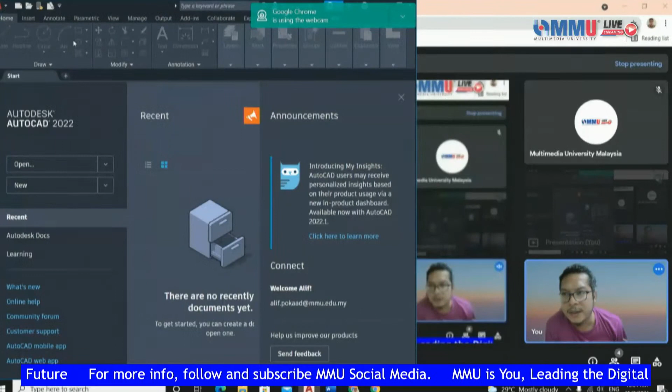So how we want to start the AutoCAD software? Basically go at here, at the start, and then click new. Then here you can choose any template that you want. They have Acadiso and Acad. The difference between Acadiso and Acad is basically just the units. Acad, the unit will be read in inch. But Acadiso, we read the unit in millimeter. So every drawing that you do is in millimeter unit in Acadiso. That's why in Malaysia we use Acadiso, because all the drawing basically we measure using the SI unit, which is in millimeter. And then we click open.

So then you have the first layout of AutoCAD software, like this. And then here are some examples that we will do today.

So because in this workshop it's 2D drawings, 2D meaning that they have just 2 coordinates, which is the X coordinate and Y coordinate, the position of X and position of Y. That's why we call it 2D drawing. We just have 2 axes, Y and X. And the plane that we draw is in the plane YX. Here is a plane YX, the drawing.

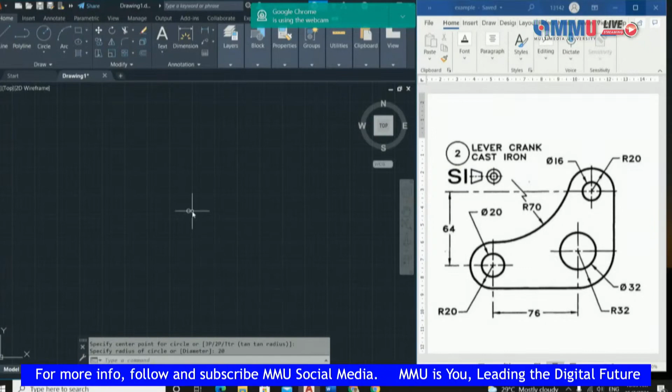And then you may zoom in and zoom out using the mouse. The mouse has a roller, right? You just roll the roller on your mouse and you can zoom in and zoom out like this. And to point, you just hold the roller, then you can point like this to find the positions. If you want to zoom in and zoom out, just roll the roller on your mouse.

Okay, so how do you want to know this is already R20? You can go to utilities. Under utilities, they have a measure. So you can just click measure and then choose radius.

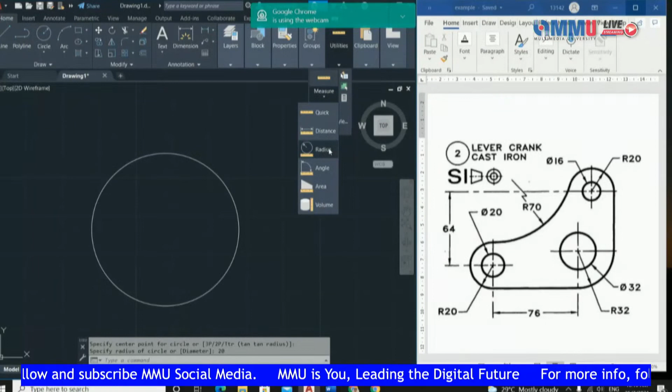Choose radius because you want to know the radius of this circle, right? So you just click radius, then select the object. Then automatically they give you the information of this circle, which has radius 20, diameter 40. So here already correct, R20. It's very easy to know whether your drawing is correct or not.

Just click at utilities, then find the measure. Okay, now the second part is you want to draw the 76. This 76 is a horizontal line.

And then the start of 76 is at the quadrant of the circle. So how do you want to get the quadrant? First you need to click the line, so you just click the line. And then it specifies the first point, so the first point should be at here, quadrant.

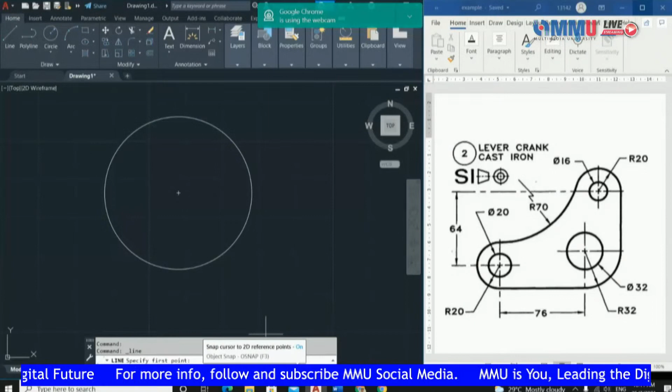Okay, make sure you get this symbol, quadrant. Sometimes your drawing cannot get the symbol because you're not on this snap cursor, so make sure you're on the snap cursor. You can see at the below, they have a snap cursor. Make sure it is on, or you may click F3 on your keyboard, then automatically it will turn on the snap, which is very important to show the endpoint, midpoint, center of this.

Make sure your quadrant is ticked. If not ticked, you need to tick it manually, otherwise you cannot get the quadrant at this circle. That's why you need to turn on your snap, make sure it is on. And then at here is a quadrant, so here is the first point of your line. You click the quadrant.

Okay, you see this line becomes free, right? You can go at any angle. But your drawing shows a horizontal line, so to do the horizontal line, you may click this one, ortho. Make sure you're on the ortho mode. If you're on ortho mode, it automatically goes to horizontal line and vertical line only. If you turn off ortho mode, then you can go at any position, any angle. That's why you need to turn on ortho mode, because we want the horizontal line.

The length of the horizontal line is 76, so you just put 76 here. Key in 76 and then enter. Then here is your line of 76. You may also use measure, click distance, first point, second point, then you get 76, meaning it's the correct line representing this horizontal line of 76.

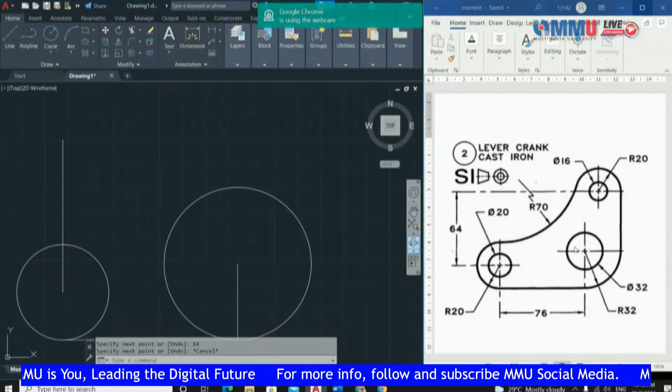Make sure you're on ortho mode, should be on. Then you get the vertical line, straight vertical line, 64. And here we don't know the width - the width we don't know. We know the height is 64, but we don't know the width.

So to get the width you need to use this quadrant. Click at this point, quadrant. Just put any line, as long as it's more than this 64. Then click this line, 64, and then click another line, straight like this. So then we know here is an intersection line - it intersects at here. Then here is 64, and here is this line - this line represents this vertical line.

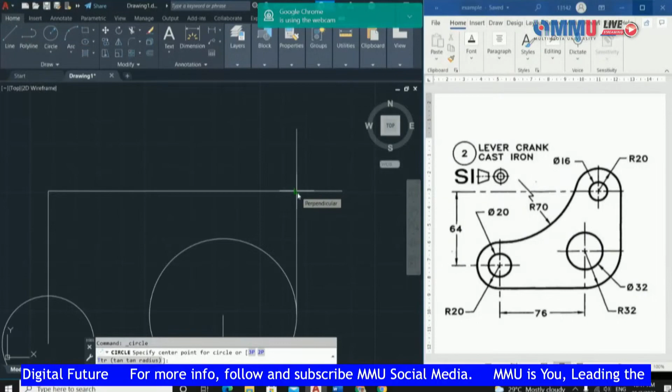Then we know that from here to here the radius is 20. Then you can use the circle, start at here. You find the perpendicular - that's okay - or you can use shift plus right mouse, you can find intersection also. Basically intersection. So how do you want to get this intersection? Click your circle first, should be center radius. Then use the keyboard, hold shift, hold shift in your keyboard, and then hold and click the right mouse button.

Click the one on the right side with your mouse. Okay, then you get this option. Go to intersection, and you get this intersection point. Then click R20. So we know that this intersection will become the center of the R20.

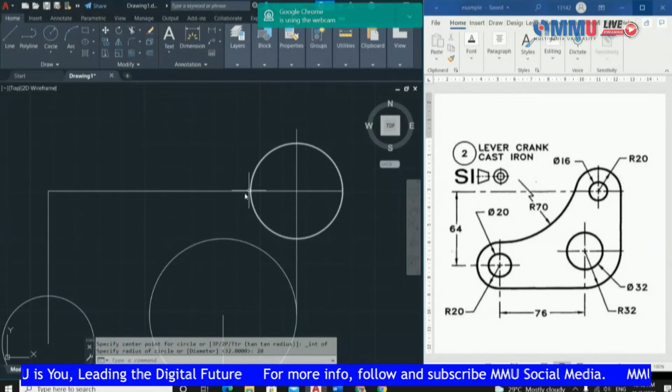Okay, here we have intersection, so just click center radius. You can use quadrant or shift right mouse, then go to the intersection. So this one is intersection, then click 20 at here.

So automatically here you may delete, because this one is just a draft line. Only this line, then you may delete. Then you get like this one. So here you just delete this one, because this line we want, right?

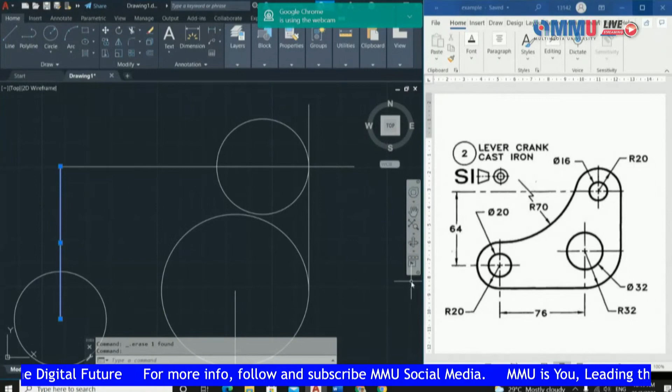This line we don't need. Also this line we don't need, just delete. So then you get this line. Here also no need the line. Now we want to trim the object because you see this vertical line until at this...

arc, right? Because here is the exit line. We want to trim this line. So how do you trim this line? You need to go to Modify, under Modify, then click Trim. Click Trim, and then read the command.

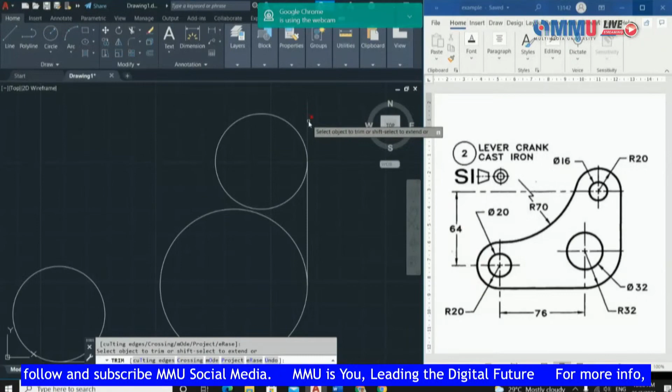They said this one, right? You just enter, use your keyboard, just click enter. And then click the line that you want to trim, then enter. So you get like this line.

So here also you want to trim, right? Because here also the exit line. So click Trim, and then enter in your keyboard, enter point. Then click the line that you want to trim, then enter. So here 1, 2, and this line.

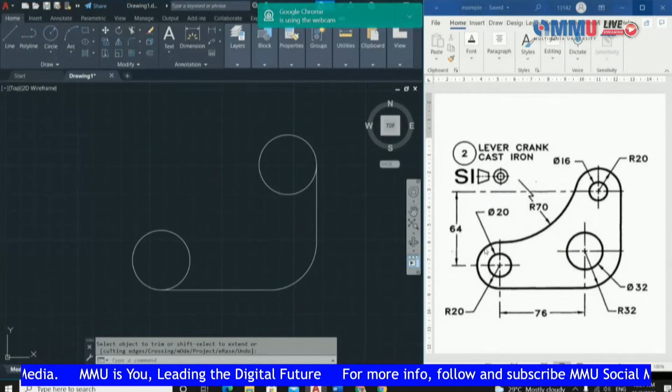Now we want to do R70. This R70 basically has conditions. This arc R70 is tangent at the R20. You see, the line connects with the tangent at the R20, and also tangent at the radius 20 at the above. This R70 is tangent at here, tangent at here. It connects with the other circle with tangent conditions.

So they give the radius 70. You may use tangent, tangent, radius. Use the tangent under circle, under circle, click tangent, tangent, radius. Tan, radius. Then you click tangent, tangent, radius, and they say specify the center point for the circle, or tangent, tangent, radius.

So you just find, you see, this symbol is a tangent. So you just click at here, then click another one at here, because here is a point of tangent, right? Click at here. Then they ask you the radius, specify radius of the circle. So the radius is R70, so you put 70, then enter.

Automatically they give you like this, R70. And then do once again the trim. Trim, and then enter. Then you may trim this exit line, then you get like this. Once again, trim, enter. You may eliminate this exit line, and then enter.

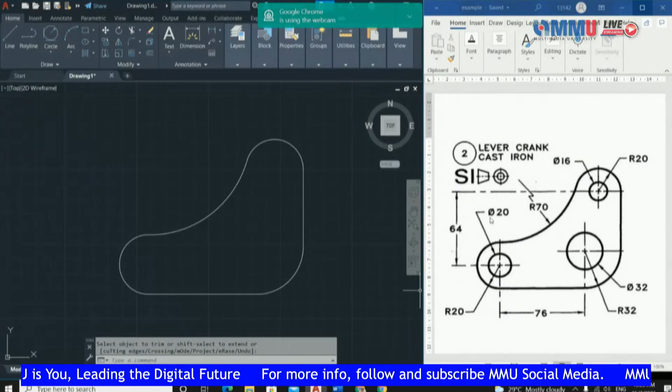Now we get the basic shape for this object. So here is the basic shape for this object. Now we want to do the small circle, right? This small circle has diameter 20. So here is the symbol of diameter, this one is the symbol of diameter.

Diameter 20. So you just click center radius - sorry, center diameter, because here is diameter 20. So you need to use center diameter. Then you need to specify the center of the circle. So if you see at here, the center of the circle is the same as the center of this arc.

It is the same as the center of this arc. You see this arrow, the arrow shows at this point. So that means this diameter 20, the center starts at here. The position of the center is at here. So you just go through with this line, then you can get this center. This one is the symbol of a center, you get like this mark, right? This one is center, then put 20.

Then you get like this. Okay, 20. Also same at here, diameter 32. Center diameter, click at here, this one, right? Okay, 32. Enter. Also same at here.

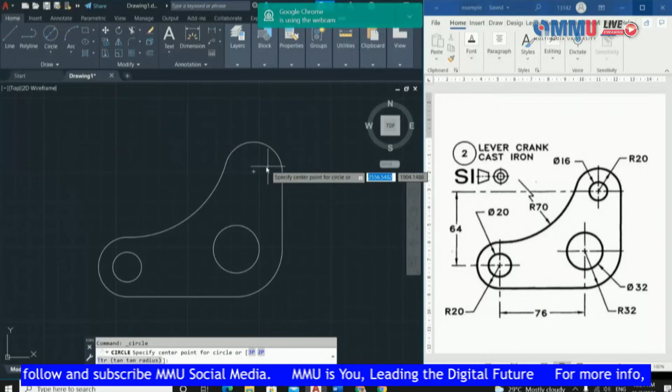Diameter 16, right? Okay, diameter 16. Make sure there is a center diameter. Okay, you just go through with this line, then you get the center. So here is the center point.

Okay, center, then here is diameter 16. Then this one is complete, the line. Okay, complete the line. So here is the object that you get.

Okay, now we want to create the center point. If you see at here, they have a center point like this, right? So to do that, there is a certain command that you need to write.

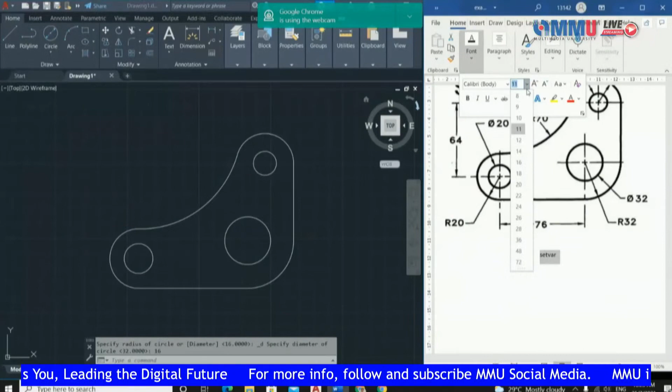Okay, the center command. So the command at here, first you need to click set var. Set var is a setting variable. There is a short command. Set var, okay, you can see, boleh nampak. Maybe I can add. Okay, you click set var, and then dimcen.

Then put -2. So here we want to setting the center mark of this circle. First you need to click set var, setting variable. And then the variable name is dimcen.

The variable is dimcen. Okay, and then you need to put the new value. Because this one is acadiso template, so basically we put -2. If there is an ACAD template, basically we put 0.1 for the size of a center mark. Basically this one is the size of center mark. -2, okay, and then click enter.

Click enter. So now we want to create the new layer. This layer we call it a center mark. So we go for the layer, then go to layer properties. Click the right mouse, and then click new layer.

Then you may put the name of a new layer. Maybe you can put center mark. Okay, center mark. And then maybe you can change the color if you want to change the color. Maybe you can put the pink color. Just click at here.

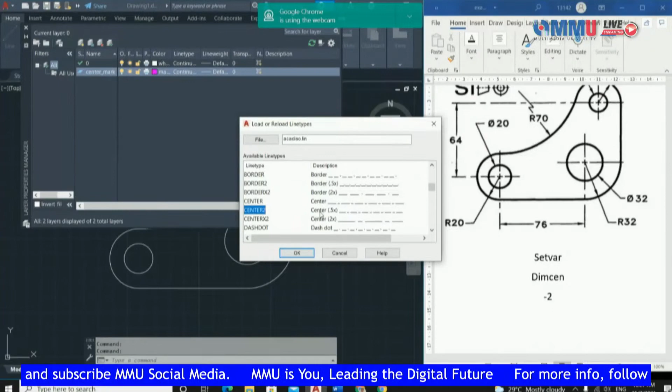So for example, you want to do center 2, because the difference between center and center 2 is the line scale. If there is center, just a 1 scale. If center 2, 0.5x becomes small 0.5, the line type scale. So better you put center 2.

Okay, center 2. And then choose the center 2. Then click OK. So automatic here will change to the center 2, the line. And then you just close it. And then if you see at here under layer, you may choose the center mark, because we want to create the center mark, right? So create the default as center mark. So if you see at here now, they will become a center mark.

So now we want to create the center line. So just type dim center. Type dim center, this one you get dim center. Dim center, you see the name, dim center. You just click in the keyboard, dim center.

And then choose this line. It's the same here, dim center. Then you get this center mark. Dim center once again. Then you get this center mark. So this is how we do the center mark in AutoCAD.

Dim center. Because here I'm using the default, not default, we call it common AutoCAD. Because in the AutoCAD software, they have many types of AutoCAD software. We have a mechanical type. If you install the mechanical AutoCAD software, you cannot...

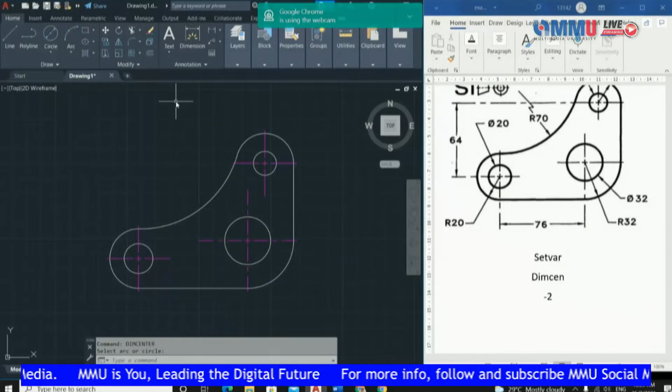No need to set up like this, because in AutoCAD mechanical, they have another toolbar at here, we call it center mark. Because here is common AutoCAD, it doesn't have a center mark function at here. That's why you need to set up like this. Setvar, dimcen, and then change to -2.

Okay, then you can set up the layer, because in AutoCAD mechanical, the default is the yellow color.

Okay, the default is a yellow color. But because we use common AutoCAD, you can change any type of layer you want. They just give you a rough layout, but you need to set it up on your own. That's the advantage here. But still we use the command.

Use the code: set var, dim send, and then -2. Then you can put the center point here.

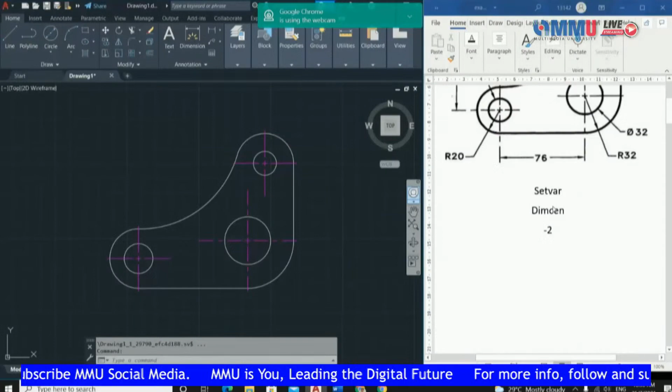So here is example 1. Now we go for example number 2, this drawing. Example number 2 is basically more difficult compared with drawing 1, right?

But it's okay, still we can do it. If you see here, it's like a hook. It's still a 2D drawing. Okay, how do you want to start?

Basically we start with this part, the diameter 48. So here we have a diameter 48, so we go for the circle center diameter.

Because here diameter is 48, right, should be diameter. Then you need to change the layer back to the default, the white color. If you see here, it becomes the white color.

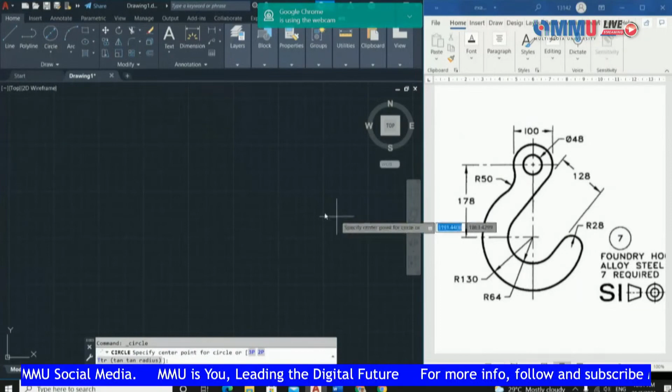So, center diameter 48. Diameter 48, and then enter. If you don't know the dimension, just go to utilities, then find the radius, click it. So they give you the diameter 48.

So here is the center, diameter 48. And then here we have 100, this is a diameter. Same, find the center diameter. Here should be the center, then put 100. Then you get like this.

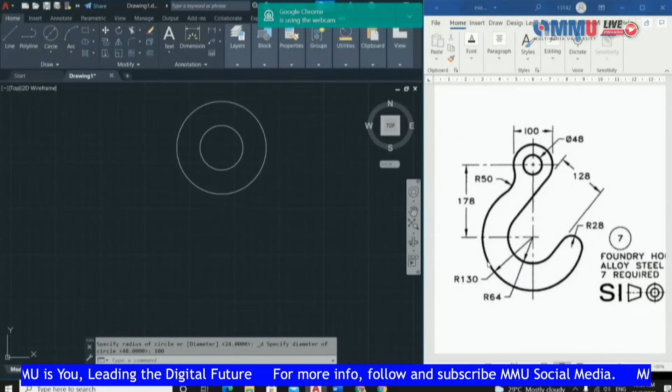Okay, now we go for the 178. This is to get the center of this arc. You see the arrow, it's very important, especially for the arc. The arrow gives you the position of the center of the arc or circle, and which circle represents the center as the object line. You see this arrow means this arc is R130, and here is a center line.

So we start with the line, starting from the center. Put 178, make sure you're in the ortho mode so you get the correct vertical line. 178, then enter. Then you may measure it to check whether you get the correct line. Correct, 178, right? Okay, and then here is the center point.

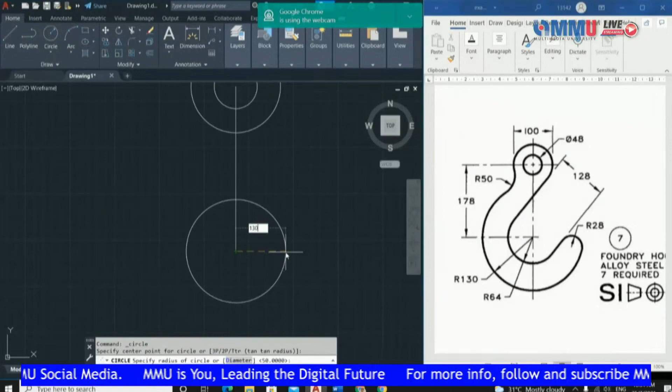And then we want to do the R130, so here is a radius 130. Go to center radius, find center radius, so here is the center point, then put 130. So here should be the radius. Then it becomes like this.

So here is 130, and then you get the R50, right? This R50 is this line, representing this arc. This arc is connected by a tangent, positioned with the 100 and also with the 130. 130 at here, then here is 100, meaning that it should be at here. The condition is a tangent radius, because you already have the R50.

So you do the tangent radius: tan radius. Click at tangent radius, then click at this point, start here, number 1, then start here until here, number 2, and the radius is 50. You get like this. Then after you get this point, you may trim. Click trim, then enter, and you may delete this line. Then you get this position. Now done for this one.

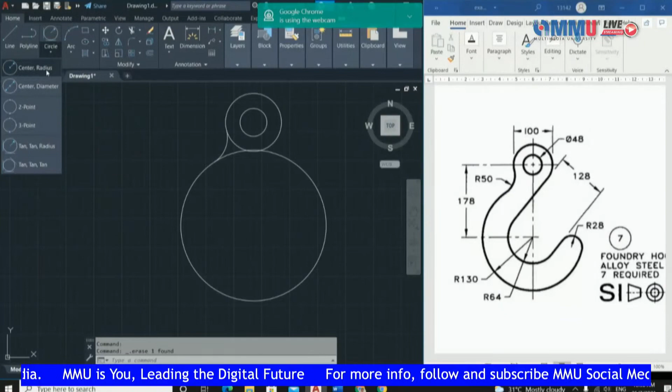Okay, same here, center point. And then 64. So here is R64, the point R64. Okay, now we want to do this line.

If you see this line, there is a straight line, and this line is tangent with the diameter 100, and also tangent with the R64. So the line is like this. Okay, so it should be a line. Click line.

Now here is a trick. You need to use the keyboard. Click shift, hold the shift point at your keyboard. Hold it, you need to hold the shift. Then click the right mouse, then you get this toolbar. This option, then click find a tangent. Okay, find a tangent, this one. Click tangent, then click at any point here.

Okay, tangent, and then do the same thing. Hold the shift at your keyboard, then click the right mouse, and then find the tangent. Just click it like this. Automatically it will create a tangent for you. You get a tangent like this.

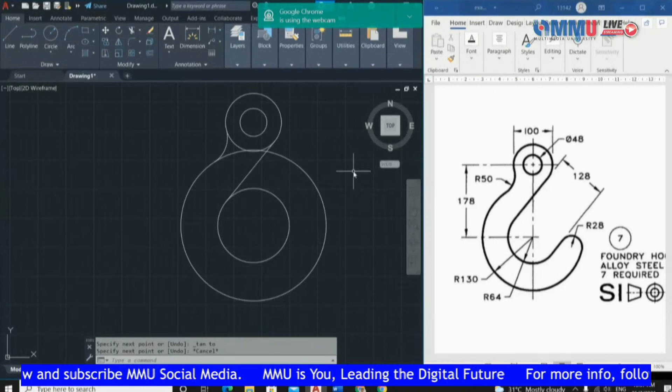So here is a tangent line, tangent line for this object. This line is tangent with the 100 and tangent with the R64. Hold the shift at your keyboard and then the right mouse. You click the right mouse, then you get this line.

Now we want to do the 128. This line 128 is parallel with this line. You see, this line is parallel with this line, selari, and the distance is 128.

This one you may use at the modified, under Modify toolbar we call it offset. Offset meaning that you want to do another line using the same previous line. It's like copy, but with a condition of the distance or width. So offset, and then they ask you about the distance, just put 128. Because the offset here is 128, right? 128, and then enter.

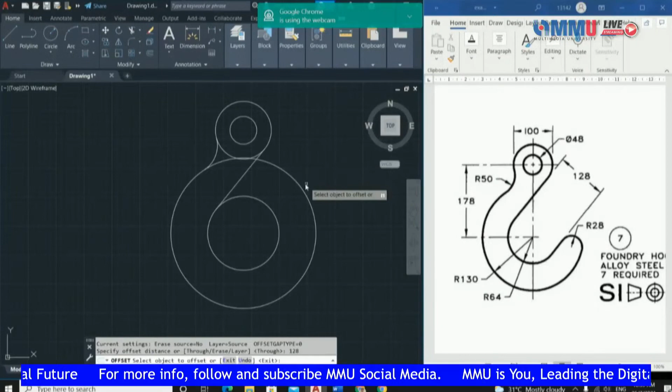And then you need to select the object, so here's the object that you want to offset. Then you need to click the area that you want to offset. It's not the above, right? It should be the below. So you just click at here, and then click enter. So then you get like this.

If you don't know how to get this one, whether it's correct or not, just do the measure. Measure, then click a distance, here to here. Then it's correct, right, 128. So here is a function of offset: you want to copy the line with the condition of a certain distance, then we can use offset. Okay, 128, like this.

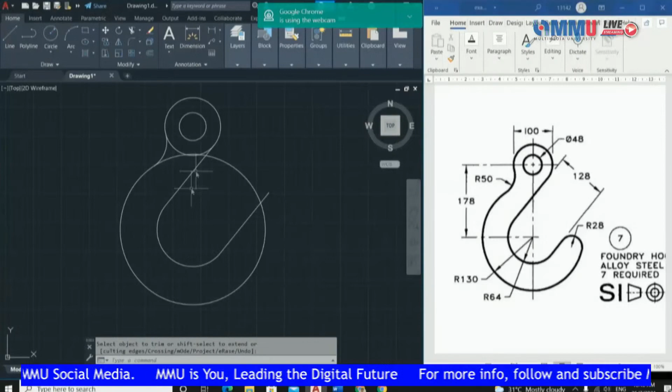Then here you may trim the object. Trim, enter, then you may delete this object. Delete the object. Now it's done until here. Now at the end of the part is this one, right?

R28, this R28, so this one radius 28 is tangent with this R64 and R130. So automatically you may use the tangent, and the radius is 28. So use a circle, tangent, radius. Tangent at here and tangent at here also, then put 28, and you get like this, radius 28 like this.

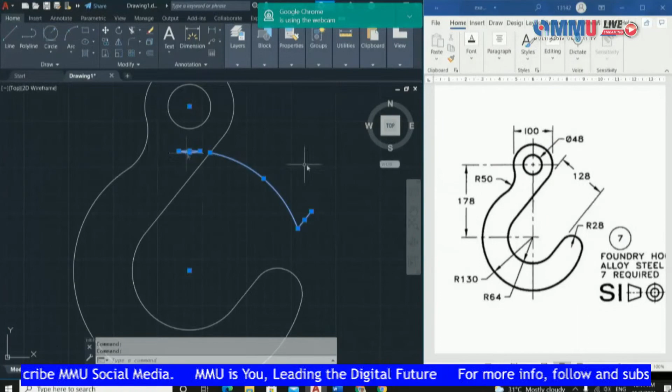Then you may trim the object. Trim, enter. So this one is the object that you want to delete, this one. And then the rest you just highlight it, and then just click delete. It automatically deletes for you.

Then you get the position like this. So here is the same like the object. And then you may put the center point, so same dim center, just click the same dim center because we use the same layout. So no need to set var, because we already set it. So dim center and then just click.

So just do the layer, change to the center mark, center mark at here under the layer. Choose a center mark because here you want to change to center mark. Then click dim center, and then choose at this object. So also same here, dim center, then choose at this object. Then you get at this point. So here is the function of a dim center, to show the center point of the object.

Okay, now we go for the example number 3.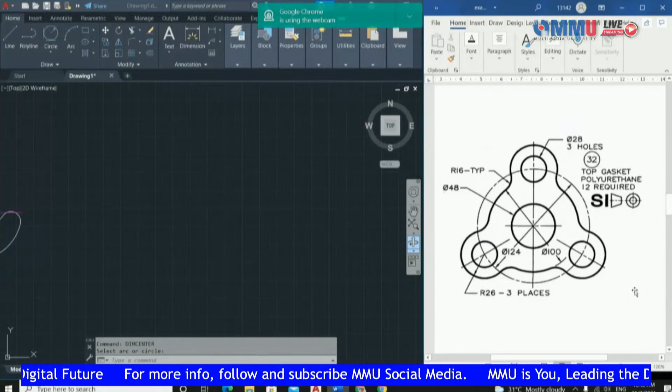Okay, example number 3. It's not the same as example number 2. If you see here, there is a symmetry point, symmetry with the 3 positions, with 120 degrees. Okay, so how do you want to start?

First, you may start here. Let me see, we start with diameter 124. Why do we start with diameter 124? Because if you see here, this dashed line is the connection with the center point for this circle and this circle.

If you see, this represents the center line for the small circle and the big circle. That's why you need to start with diameter 124 first. So circle, center diameter. Click center diameter. Here, 124. Why do I put the center mark? Because this line is not the object line, it's a center line, not the object line, that's why you see the line is dashed. That's why I use center line here, 124. Then change back to the default line, which is the object line.

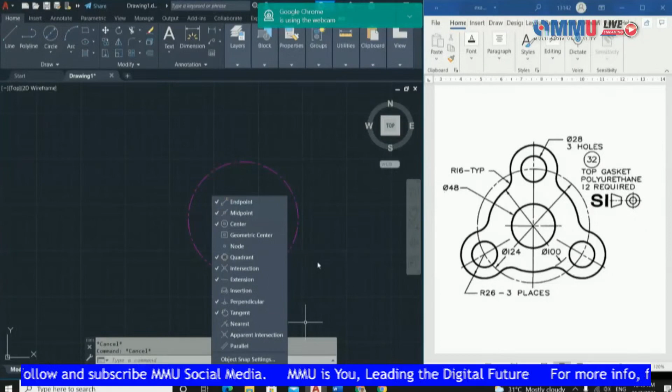Just click at this arrow, and then make sure you tick the quadrant. The quadrant is ticked. If it is off, you need to turn it on like this. Make sure your quadrant is on, then you get the symbol of quadrant. Here, equal with diameter 28.

Diameter 28, and then the big one is radius 26. You see the arrow, and then we mention this arc, the arc is radius 26. So center radius, at the same center point, quadrant, 26, radius 26, like this.

Now we want to get another two lines, which you see there is symmetry at this condition. So you may use the modify tools. Click on modify, click array, then find polar array. Under array, they have an arrow, so this arrow finds the polar array, click the polar array, and then first they ask for the object that you want to array. So this object, these two objects, you just click it and then click enter.

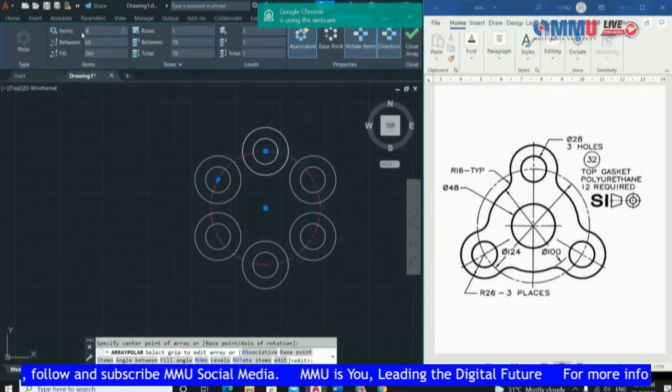Click enter, then they ask for the axis of rotation. You see this is a rotation, right? The axis of rotation is at the center of diameter 124, at this point, the center. Then you click it, and then the item here you change to 3. Change to 3 here, you see my cursor at the top right. The items here change to 3 because we just need another 2 circles.

Change to 3, then click enter and enter. So automatically it will create another 3 circles based on the reference of 360 degrees. So here is the circle.

Now we want to create this one, they have a diameter 100. So this one is diameter 100. Circle, center diameter. You want to do this one, diameter 100, and the center is here, the same center as diameter 124, it should be here. And then here, 100. So here is diameter 100.

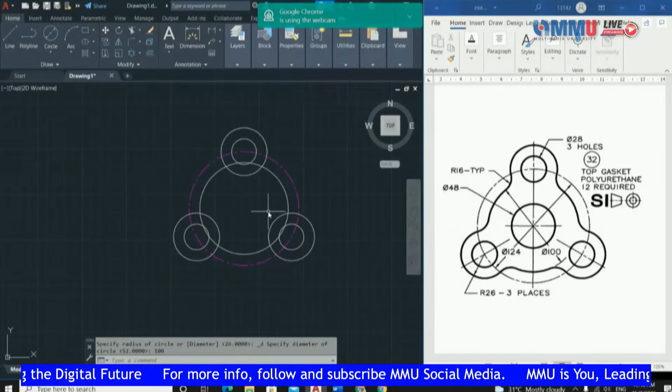Now, how do you want to connect between the diameter 100 and the R26, this one is R16. This R16 is tangent with the R26 and also tangent with diameter 100, tangent with diameter 100. So it should be tangent radius. Tangent here, and then the radius is 16, so you just key in 16, then enter. So automatically it will create R16 for you here.

Also the same here, so you just use tangent radius, tangent here, and then 16.

Okay, 2 point at here. Okay, R16. Because if you see it here, no need to show this line, right? Okay, you may hide this line. So how you want to hide this center mark of this pink? Because this pink color becomes mengganggu, right?

Mengganggu your eyes. So you may click at here, click this one, click right mouse. Then go to isolate, isolate and object isolation. So automatic - sorry, isolate, hide object, sorry, hide object. So hide object. Once again, make sure you highlight the object that you want to hide. Okay, isolate, then hide object. So automatically it will hide the center point for you, center mark for you.

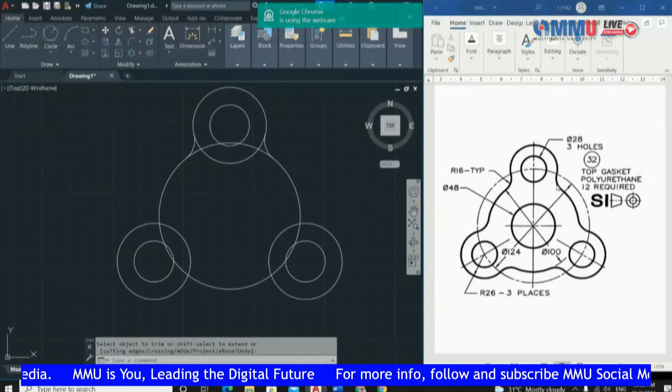Okay, then you need to create another two set, right? 16 at here, 16 at here, here and here. So use the same function, which is a polar array. Okay, polar array, and then click these two objects, 1 and 2. Okay, because we want to create another two set, right? Okay, another 2 number of set for this object.

Okay, you highlight it. Okay, and then enter. Okay, and then specify the center point. The center point should be at here. Okay, center point of the polar array. Okay, and then the item at here you change to 3. Okay, change to 3 and then enter. Automatic it will create another 3 line for you.

Okay, you see if I click it, it become as a one set. 1, 2. You see that they become highlight all the line. Okay, because this one you use the polar array, that's why it become a one profile. Okay, it becomes a one profile, it's not become a 6 profile. It become as a one profile. Okay, because you use array.

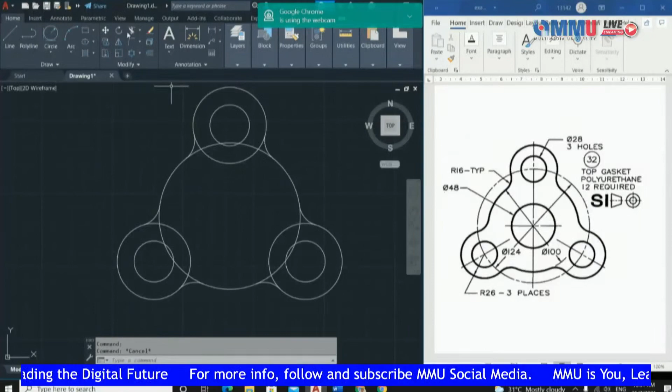That's why it's a disadvantage at here. Okay, why I will show it after this, why I said this disadvantage. Okay, now we want to delete this another line, right? This line. So I click the line, trim, then enter.

Okay, this one I delete it. Okay, same in here. Okay, so okay. Okay, also see at here. I erase it. Okay, I trim it, the object that I don't want this line. Okay, then here I delete. Okay, here also I delete it.

Okay, now you see what I said, it become disadvantage. Okay, because at this line, you don't want this line, right? Because this line is an excess line. You see at here, it doesn't have the connection line. If I click the trim, I want to trim this line, right? If I click the trim, I cannot trim this object. You see, it become the no entry symbol.

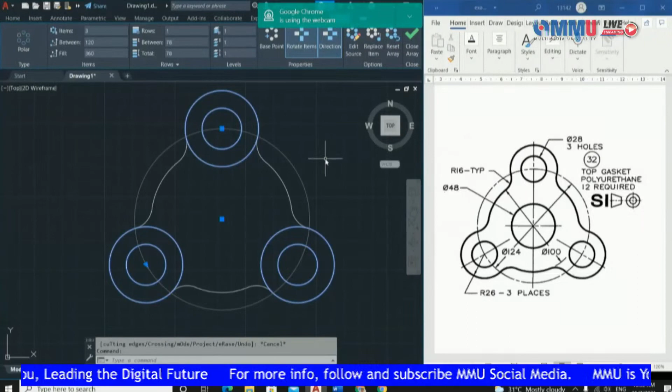Okay, I cannot trim the object because this object that I want to trim is not a one profile. There is the one set of profile, it's not a different profile. There is a one set of profile. That's why I cannot trim this object because I'm using the polar array.

So how you want to solve it? So to solve it, you need to explode it. Okay, so then it becomes the different profile. Okay, separate profile, it's not become as a one set of profile. Okay, you need to separate it. So how you want to separate it?

You go to the under modify, you need to click the explode. Okay, explode, then you may trim the object. Okay, you want to separate the profile, because you use the polar array becomes as all the profile become as a one set of profile, right? Okay, so click the explode at here. Okay, and then click this circle. Okay, click it, then enter.

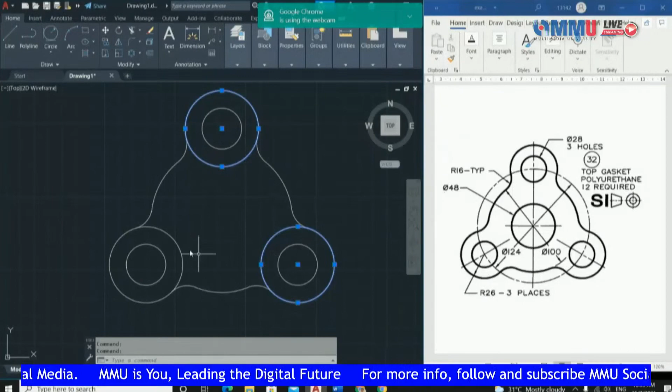Okay, so now if I click it, then it becomes separate profile. Profile number 1, profile number 2, profile number 3. Now it become a separate profile. That's why you need to separate it. If you not separate it, you cannot trim the object.

Use explode to trim it. Then you may start to trim the object. Enter, then trim this line, and this line. Automatically you get like this object.

At the center there is a diameter 48. Center diameter, because diameter 48, right? The center is at here, 48. Done, you stand at here. Finish, then you want to call back the center line.

Just click the right mouse, go to isolate, object isolation. So automatically it will show back your center line. Show back your center line. Okay, can. So here is...

Number 3 lah, the number 3 part here. If you want to create another this line, the center line, for example, you want to create another center mark.

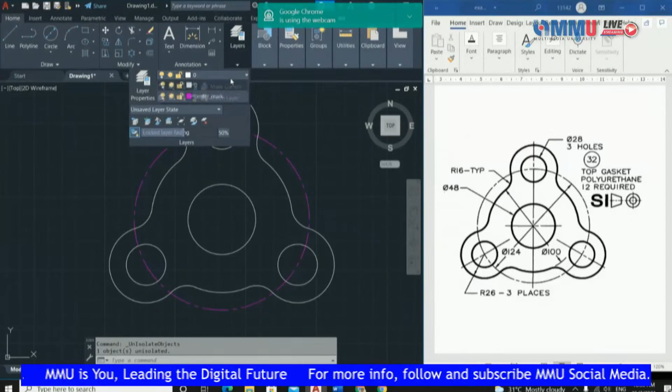Make sure you add the layer, change to center mark, then click name center. At this point, right, this line. Because you just need this point, right, this one can delete lah. Sorry, this one lah, you just delete it. So just remain this line only.

Go to the polar array once again, and select this object. Enter. Start at here, center mark, then change at here to 3, and enter. Then here it becomes the center mark of this line. Also same, then center for this line. So here is the center mark for this object, the center mark for this object.

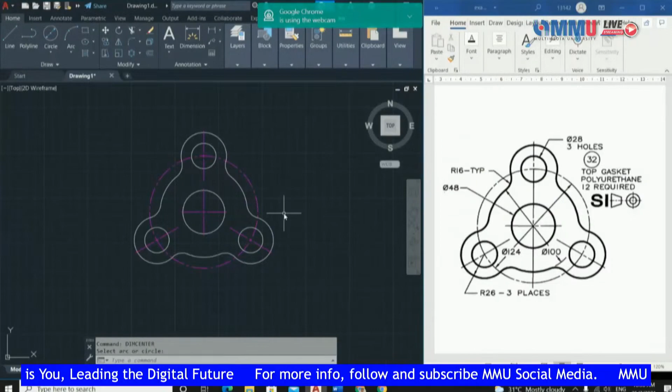So here is an example of a number 3 lah, example of a number 3. So because here is a tutorial 1, basically, tutorial 1 for the AutoCAD.

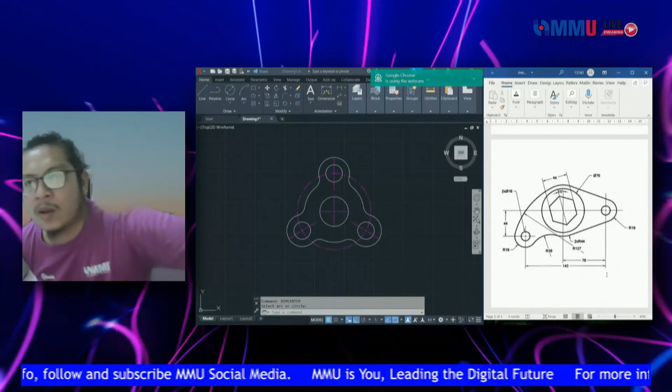Well, for me, if I teach a student, I will give a student 5 minutes to see the question first, to plan which point you want to start to draw, because the first starting point is very important. If you miss the correct point, it becomes difficult for you to answer the questions, because it's not just one step to solve it, there are many other steps to solve it.

Maybe you can start at here to solve it, maybe you can start at here to solve it, but which point is easy for you to solve it? The more faster you can complete it, it's very important, right, because during the test they have a constraint of time. That's why they need to manage which point they want to start.

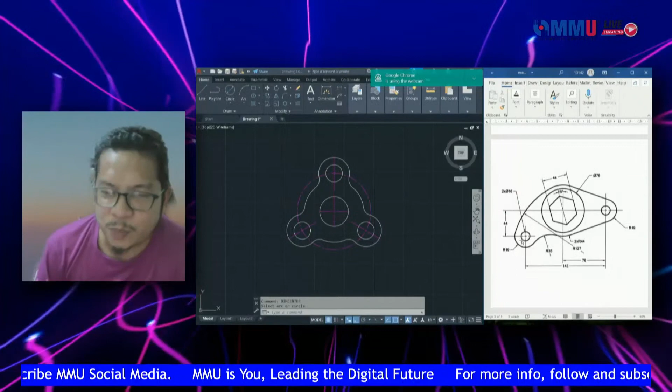It's not like the theoretical topic. Basically this engineering drawing, you need to practice, you need to practice. It's not just you memorize the theoretical and then you can solve it, cannot lah. You need to practice and practice, there is no shortcut way. So if you see these questions...

These questions, so you may start at any point basically. You may start from the radius 19, or you may start from the radius 19 at here, radius 19 at here. You can start from the below, or you can start at here, it's up to you. So first I start with the...

Saya start kat mana dulu kan? Saya pun terlupa. Okay, we start at here first lah, we start at here first.

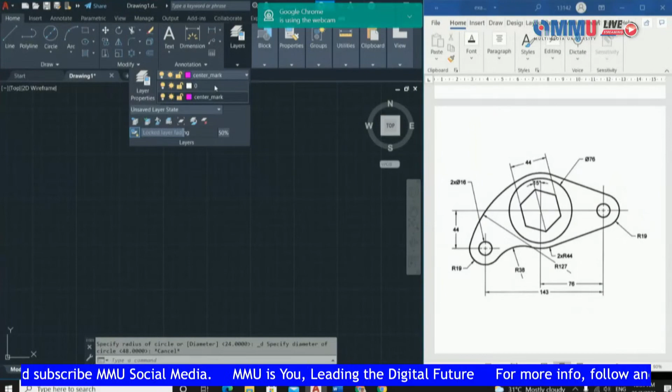So diameter 16, we start with diameter 16. So first center diameter, center diameter 16. So the layer I change it back to the layer, this one, layer. Diameter 16, so should be center diameter, center diameter, and then here should be 16, 16. If you measure...

If you measure radius, radius, so automatically here the diameter is 16. Represent for this line, diameter 16, diameter 16.

And then if you see radius 19, and then you show the arrow, the center, the arrow shows the center line at here. That's why you need to use a ruler. If you use a ruler, if you project it, you can see this arrow shows this center at here, meaning that this radius 19 is the same center line with the diameter 16. So change to center radius because there is the R19, right? The symbol is R, so R means represent as radius. So this one represents as diameter, the symbol, diameter. You see, right?

This one. Okay, so here is a radius 19. Center radius, and here 19. Radius 19.

Okay, then we do for this one, 2 times radius 44, meaning that they have a radius 44 in two circles. So first circle at here, R44, another circle at here, R44. Meaning that they have two radius 44, one at here, then 44 at here.

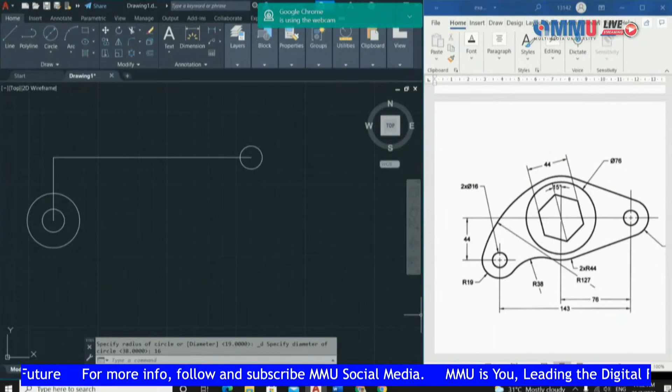Same, right? Because 2 times diameter 16, meaning that they have two locations that have the same diameter. So here is diameter 16, here also diameter 16. So it should be center diameter, and here 16. And then here also have a radius 19, same, like this, radius 19. So then center radius, same as center point, 19. Okay, and then here you may delete, because this one is just a reference line.

So now you have one line and another line at here. Okay, now we want to do the 76. 76 at here. Because this 76, you can get the center line of this circle, diameter 76. You can get the center line for this diameter 76.

So how you want to do that? This one, we know at here is 76. So basically I just do like this. Center radius, center radius. Then find the center of a circle. And then I put 76. Because I want to get the center point for this circle.

We want to do the diameter 76. So how to get the center point for this diameter 76? I can get it from this quadrant. So then I put the center diameter 76. And here, then find quadrant. Because this quadrant is basically at the same level with the center point at here, so automatically here to here is 76.

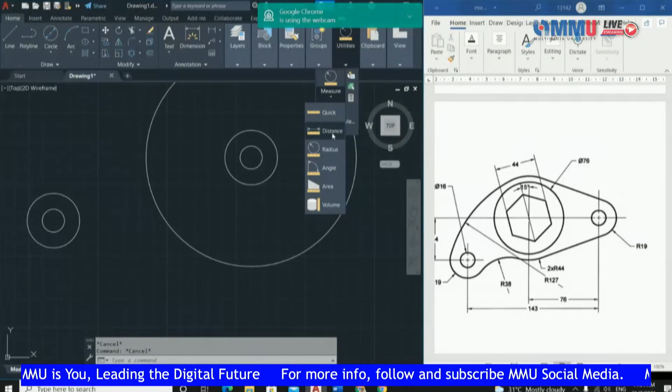You may measure it if you want. If you measure distance from this center point to the quadrant, it's 76, which is similar with this line, 76. That's why to start diameter 76, center diameter, I find the quadrant here and start with the 76, diameter 76. And I get this.

Then here, this reference line, you may delete, it's just a reference line only. So here you get the diameter 76. And then what else we want? We want the radius 44.

Radius 44. So this radius 44, if you project this arrow, it intersects at this center line, meaning that this 44's center line is same as the diameter 76. That's why you need to project this arrow. If you see, if you project this arrow using a ruler, it intersects at here.

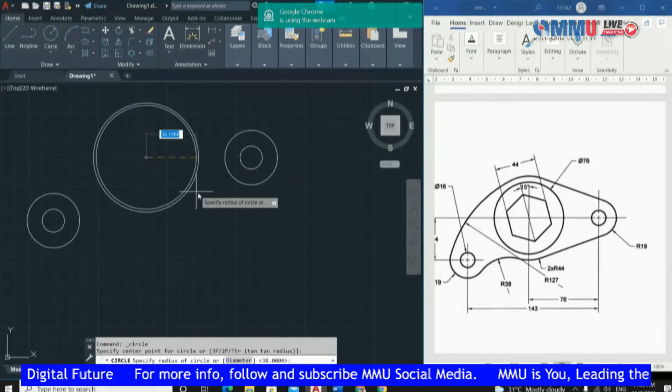So we know that this R44 has the same center line as the diameter 76. That's why at here you start center radius, because R44, right? Center radius, same point at here, and then put 44. And it becomes like this, 44, radius 44. And then from this radius 44, you get this one, the radius 44.

And then here they have a tangent radius, because here they give R127. You see this arrow. So they put this arc as radius 127, and this radius 127 is tangent at this circle and this arc, tangent at the R19, tangent at the R44. Meaning that it becomes like this.

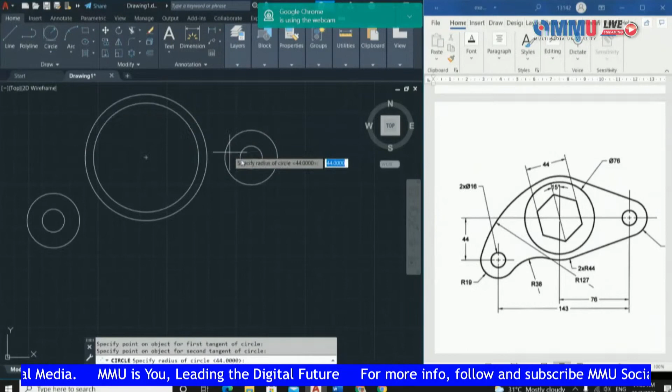It should be like this. That's why here you need to find the tangent radius. Tangent at here and also tangent at here. Then the radius is 127.

127. But if you see at here, it becomes internal, right. It becomes like this, and it is wrong. It should be like this. Then you delete again.

Tangent radius. Maybe you need to click at here, do not click at here, that's why it becomes like this. You need to click at here, number 1 and number 2. Then 127, then it becomes like this. That's why it's very important to know the position of the tangent. Now it becomes like this.

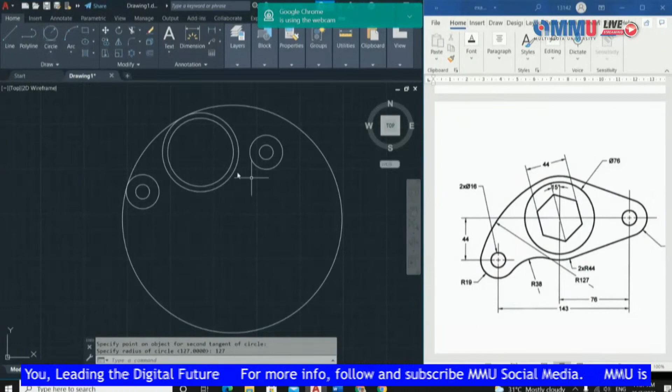Then click trim, and then enter. Here is a 127, this arc is 127. You may click Utilities, radius. Then if you click at here, it's 127. Okay, now we want to do this one.

This one is a straight line. It's not the circle because it doesn't mention any radius. If you use a ruler, here is a straight line, there is a line. This line is tangent at the radius 44 and tangent with the R19.

So just click a line. Hold your shift on your keyboard, shift and then right mouse, then find the tangent. Hit shift, right mouse. Hold the shift on the keyboard, then right mouse. Tangent at here, and then once again shift, right mouse, tangent at here. Just click it automatic, you will click the tangent at here.

Same at here below, also the tangent line. So you click the line, hold the keyboard for the shift. Hit shift, right mouse, but first you need to click the line. Click the line first, shift, right mouse, tangent at here, and then shift, right mouse, tangent. Shift you need to hold, then enter.

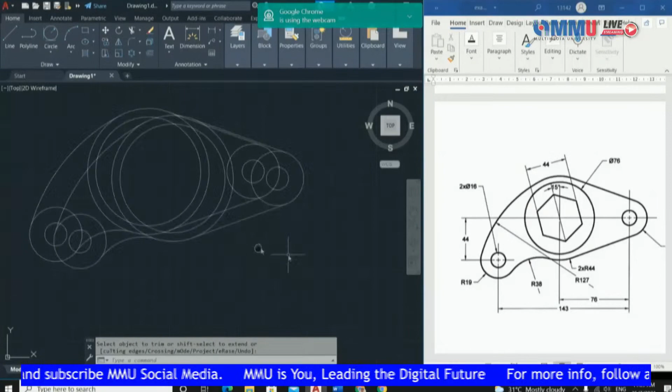Then you may click the trim, enter, then here, the point. And then also you may trim at this point and at this point. You get like this. Okay, so same at here.

So here is the basic shape of this part. Now you want to do the hexagon. This one is a hexagon, right, and this hexagon is rotated 15 degrees, and the center of the hexagon is same as the center of this circle. The diameter of the hexagon is 44, they give a dimension of 44. So if you have it like this, basically I will do like this.

I will create a center diameter because we know that here to here is 44, right. I will create the circle first, center diameter, I want to do this. Center at here, the same center, right. I put 44, 44, and then enter. So here is 44.

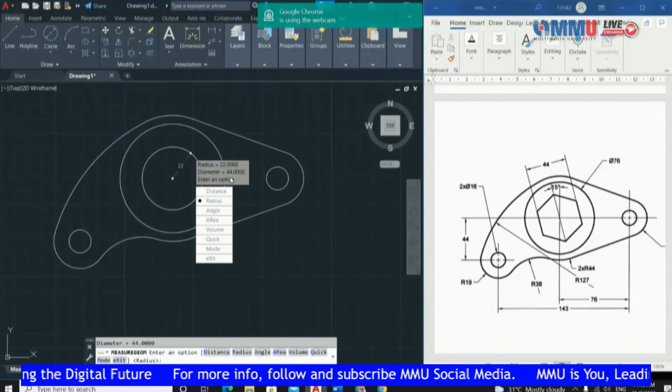If you use Utilities, measure radius, so here it becomes diameter 44. And then to get the shape of a hexagon, you may click at here, under draw, under rectangle. Beside rectangle, they have an arrow, so you click this arrow, then click polygon. Rectangle, and then go polygon. Then read the command at the below, they said enter number of side.

Because hexagon, it should be 6. Then put 6, hexagon right, put 6, and then enter. Specify the center of polygon, so center of polygon at here, the same center as of this circle. Basically hexagon, they give you two types, inscribe and circumscribe. That's why I draw the circle first, so that I know this hexagon should be inscribed or circumscribed.

What happened, I put inscribe, so inscribe becomes like this. It becomes like this, meaning that the hexagon is inside the circle, we call it inscribe. But if you see at here, this hexagon is not inscribed. What happened if I put inscribe? Yeah, put like this, inscribe right.

Then I measure the distance, it should be side to side, right. Side to side should be 44. If you measure, it becomes not 44, it becomes 38 only. That's why I'm saying this hexagon cannot be inscribed, it should be circumscribed. Then here is wrong.

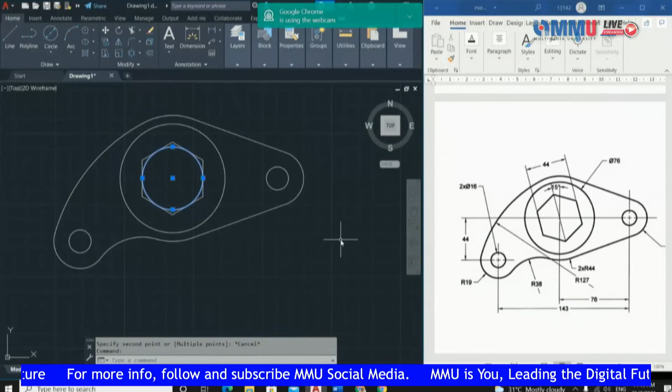No need to delete, because we want to rotate, right? Here it's not 15 degree. If you see the pitch of the hexagon, it's not at 15 degree, it's still a vertical line, parallel with the vertical line. That's why here you need to rotate 15 degree.

So how you want to rotate? You can go under modify. Under modify, they have a rotate function. This one, rotate. Okay, under modify, rotate. Click the hexagon that you want to rotate, this one, right? Click, and then click enter.

Okay, enter, and then specify the center, rotate specify base point. Base point is at here, the center of the rotation is at here, the center of the circle.

And then you may put the angle. So angle, I put 15 degree, because they said 15 degree, right? At here, 15 degree. So I put 15 degree and it become like this. So automatically it become 15 degree like this.

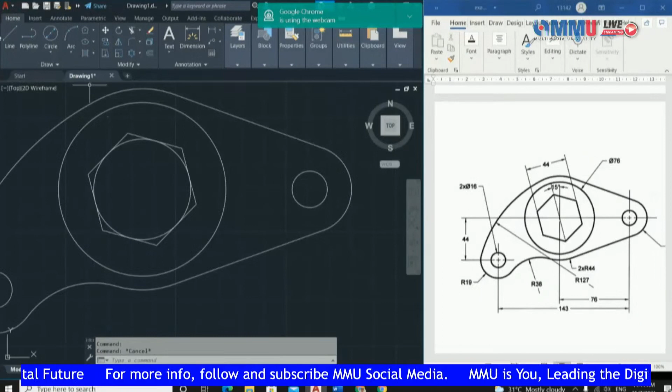Okay, so if you want to measure whether this already become 15 degree or not, you just click the one circle, put it here, and then put like this. Then you measure it.

Measure, utilities, measure, angle. Here is the pitch, right? And then here is a vertical line. It should be 15 degree. If you see, it become 15 degree, meaning that it is same like this. You can measure it from utilities, angle.

This one, utilities, find angle. Angle, pitch, and this one, 15 degree. So meaning that it's already 15 degree.

Okay, so then here you may delete because this one is not the object line. Then you get the same as the object.

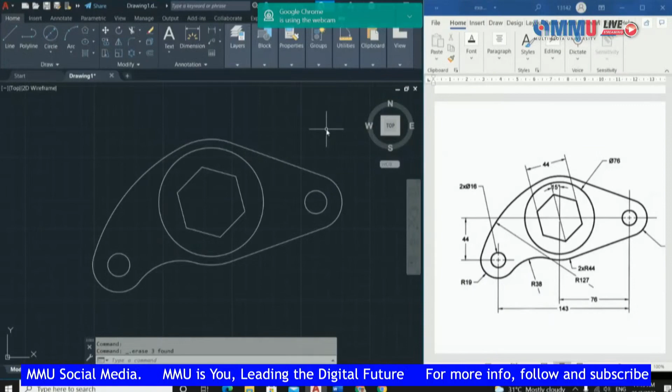Okay, then to do the center line, the same center mark, just type dim center. Dim center, this line. Sorry, dim center, this line, and this line, and then dim center at here, this line. Okay, then you get like this object, the center of this object.

Now we go for the last example, then we finish. So this one is an example number what? I don't remember. Number 5, last example. Okay, last example, number 5. I think there is something familiar with you.

Number 5, the object, there is a spanner. The dimension for the spanner. You may look first at the object, how to draw the spanner, which one you want to start with, how you want to start the object. So here is a spanner drawing.

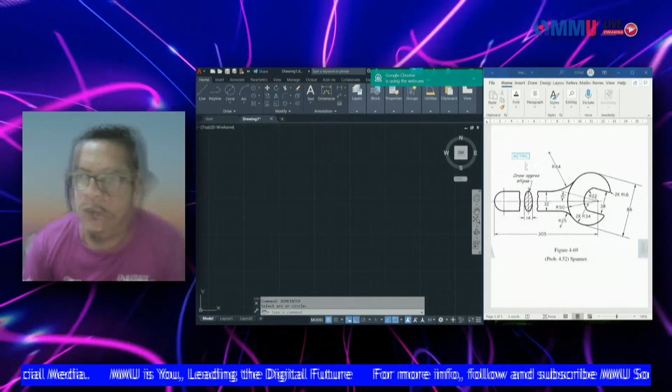So basically we need to draw this head, the head of the spanner, and then the unit is in metric. They already mentioned the unit is metric, so automatically all the units of this drawing is in millimeter. So we try to finish it in 15 minutes, hopefully.

Okay, I can read this one, but this one has a tricky part at here. I think most of the students start with the 15 degree, they start with the rotation 15 degree. If you see, most students start with 15 degree. But if you start with 15 degree, it becomes a bit difficult. That's why I'm saying the first step is you need to analyze the drawing.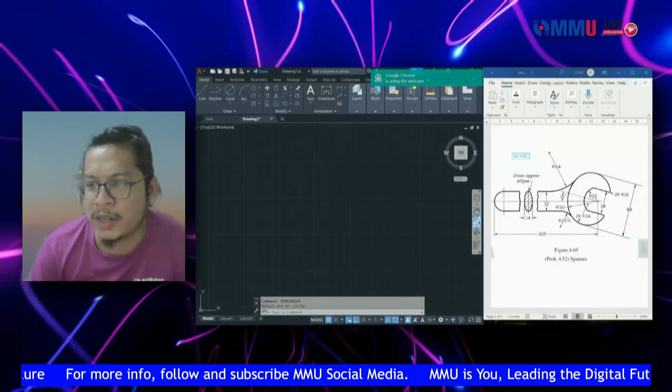If you start with 15 degree, rotating the part first, then it becomes very difficult to solve it. That's why this part, do not turn 15 degree first. You need to make it a normal view, which is the Y and X. 15 degree, you need to rotate last. Okay, the last step is rotate 15 degree.

So how you want to start? Basically, we start with the 86. We will start with 86, but this 86, do not rotate 15 degree. I know if you rotate 15 degree - why would you rotate 15 degree? Because there is parallel with the 38, right? Parallel with 38, and then this 38 is 15 degree rotation. That's why we start it as a normal view. So we start with the 86 line, like this line.

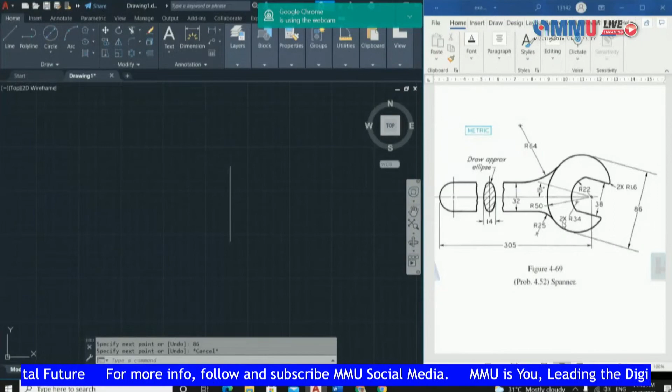Okay, so 86. I start with the normal line first, 86, this one. I don't rotate the line, make it a normal vertical line, 86. Then at 86 there is the R34, right? Two locations of R34, so R34 here and R34 here, upper and lower. The constraint is from here to here should be 86, that's why I put 86 first, because we know the constraint of R34 should be maximum and minimum distance is 86.

R34, so I put center radius 34. I put center radius 34 at here. Here we become the center line of a 34. Here 34, 34, and then here we delete. So here is 34. Also same 34 at this line, right? Here also 34. Then here you may use a copy.

Under Modify they have a copy. You click copy and select the object I want to copy, this one, copy this object, enter. They said specify the base point that you want to copy or move it, the reference point. So the reference point at here, I put the quadrant, then put it at here, and enter. Because I know here should be 34, here should be 34 also, but the maximum and minimum should be 86. So here to here 86, here 34, below also 34. So it represents 34 here and 34 here.

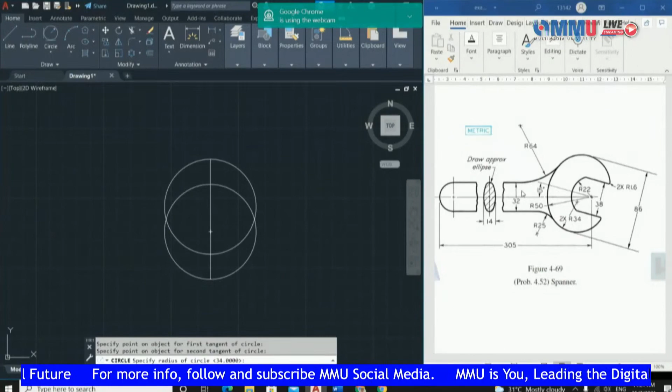Then start with the radius 50. This one, we know that this radius 50 is tangent with the 34 upper and 34 lower. And that 50 at here. Radius 50 should be at here, this one, 50 should be at here. So it should be tangent, tangent, radius. So tangent at here, and then the radius is 50. This line is a radius 50. Then put 50, enter, so automatically you get the radius 50 at here.

This 86 you may delete, because this 86 is no longer needed after this, you may delete it. So here is R50, R34, and R34.

Now we want to do the radius 22, this one. So if you see this arrow, R22, the center point is same with the center point of the R50. You see, this R22, the center point is same with the radius 50 center point. In this line, the arrow intersects with the center point of R50. So you need to do the center radius, and then find the center point of R50. R50 is here, this one. Because this one is 34, and it's the same position, right? Same vertical line, so automatically here is R50, it should start at here, R50.

And then put 22, enter. So here is a radius 22, radius 22 at here. And then under radius 22, they have a 38.

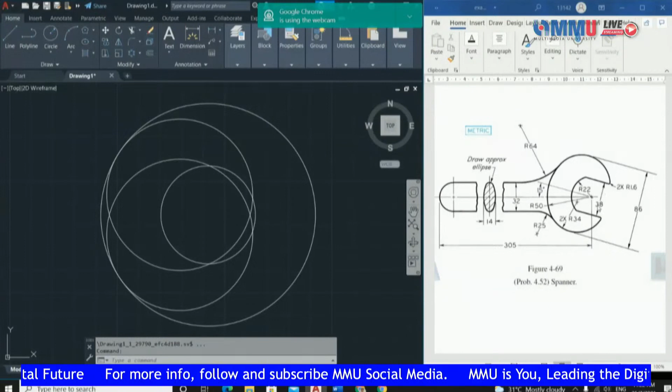38 divided by 2 is around 19. So I put 19 below and 19 above, I just copy it. This one at the center point, I put 19 and 19 at the center point. Once again, I find 19 at the center of the circle of the radius 22. So 19 here and 19 above, so that it becomes 38. 19, 19, 38, because I want to do this one, 38.

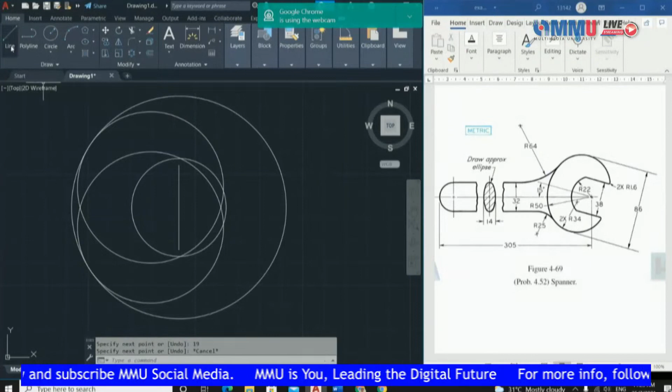Then create one line as the intersection. It will intersect with the radius 22, right, and also with the 34. So it should connect like this, number 1, and also connect to this one.

And then I copy the line, number 1, number 2, enter, and then it should be from this endpoint to this endpoint. I copy it, I copy the line.

Now it becomes a bit messy, right? Then you need to trim the object. So how you want to trim the object? You need to refer to the actual one. Trim, enter. So this R50 until here, right? So here you may delete first, R50. Then trim once again, enter.

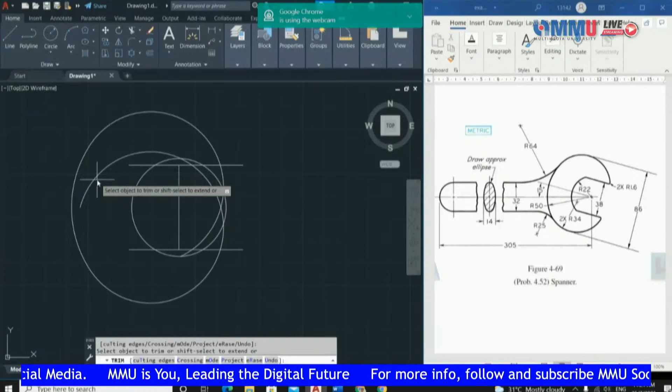And then here also no need. So you will connect like this. Then here no need also.

Here also no need. Okay, here also cannot, done. Then here you may delete.

Okay, then you get like this. You may measure, if you want to check whether your angle is correct or your distance is correct or not, you may measure distance.

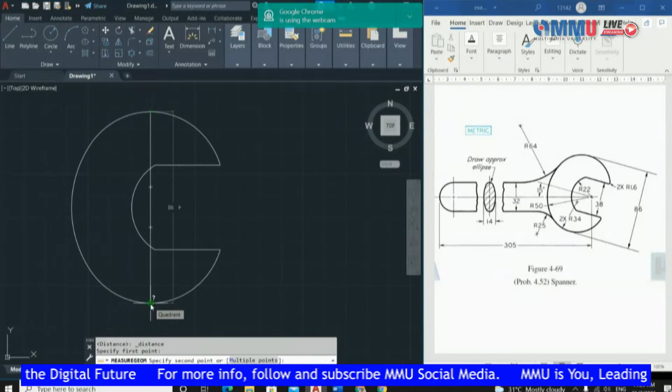Then here should be 38, same 38. And then the part, quadrant to quadrant should be 86, correct 86. Okay, and then here should be R50.

So radius here should be R50, correct? And then here also should be R34, which is correct, R34. And then here also should be R22.

Okay, after you do like this, then you may rotate the object. That's why I said rotate will become the last step. Rotate 15 degrees, right? So then you rotate the object, select all, then enter.

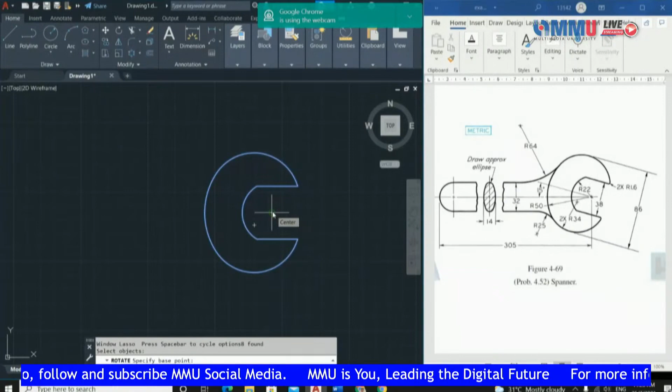You may start at this point, at the center point. Make sure you put it at the center here. Click at here, and then you may put 15 degrees, and then enter.

It should be opposite, right? Negative, should be negative 15 degrees. Rotate, enter. Center is at here, and put negative 15 degrees, so that it becomes the clockwise.

If you put 15 degrees, it becomes counterclockwise. If you put negative 15 degrees, it becomes clockwise. Put negative 15 degrees, then you get like this, similar like this object, 15 degrees. The rotation is 15 degrees.

And then just make it 305 from this center until the end. So it should be from this point until the end, 305 here. And then here is 32, right? 32, and then here become a semicircle.

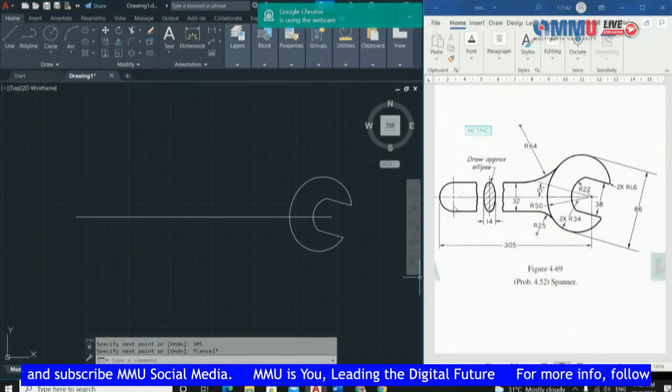Semicircle with the diameter of 32. So then center diameter at here, so it becomes 32. Enter. And then here you need to move the object.

Move, this one under Modify, they have a move. Click this object, enter. And then the base point is from here to here. Now it becomes 32 at here.

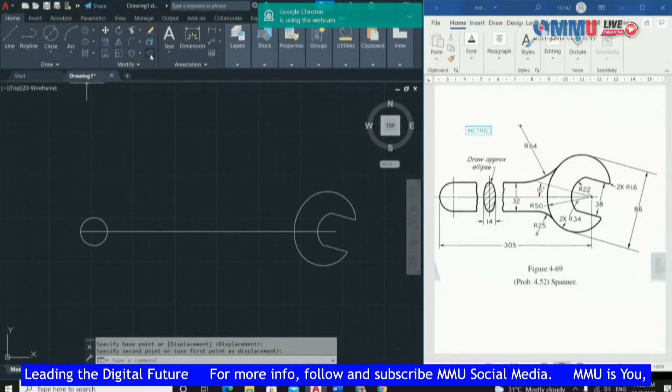And then you may offset the object. You may use offset because it is a center, so offset upper 16, lower 16. This one under Modify, they have offset. The offset 16, enter. Number 1, number 2, so 16 upper and 16 lower.

And then you may trim the object, enter. So trim this part, this part, this part, and this part. And then enter. Then here you may delete, so this line you don't want this line, right?

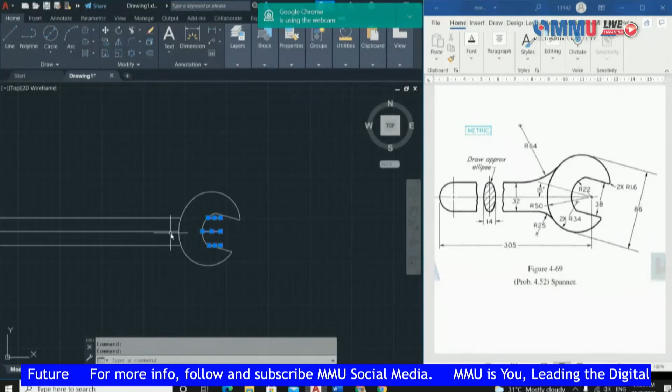Okay, then you get like this now. And then here they have a R64. This R64 is tangent with the 32 line, and then tangent with this one. So tangent, radius. Tangent at here, tangent this part, tangent this part, and then 64. Then enter, then you get like this.

Same at the bottom, this one, and then 64. Enter. Then you may trim the object, enter. And then this one and this one. Then you get the spanner.

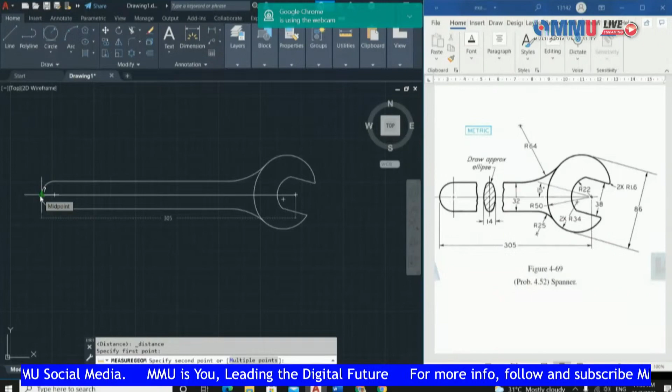If you measure this part, the distance, this point to this point, equal with 305. Same, right? Equal with 305. And then if you measure side by side, it's equal with 32, which is same at here. 32.

So here is the drawing. I think I finished the workshop, because I promised I want to do until 11:30. So Alhamdulillah, finish 11:30, sharp 11:30.